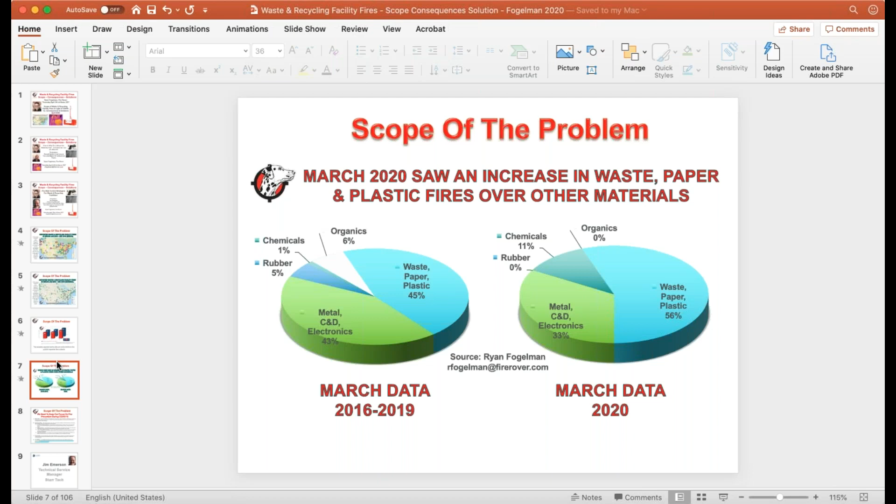But we have protected over 200 facilities. Again, some of those are waste, some are hazardous materials, some are organics and electronics and C&D and others. But we have seen an increase in transportation-specific fires for some of our clients.

So just to get into why in March did we see a lower percent of incidences? There were a lot of locations that were shut down, and we're still seeing that where recycling drop-offs are shut down.

I believe that we have a quarantine effect that we're dealing with, which is the spring cleaning of all spring cleanings. Normally people talk about spring cleaning and it's used in marketing and advertising, but really at the end of the day, who actually does a full spring cleaning? When everyone's been quarantined in their homes, they're doing full spring cleanings.

Meaning basements and attics and garages and every closet that they have. And again, all that material, if they're educated enough to recycle because we as an industry have educated them, they can't leave their house theoretically to go to these drop-off points, and a lot of the drop-off points are closed. So just like anything else, a lot of this stuff will end up in our waste and recycling bins on the curbside.

So what happens with all the old computers when they get taken out, or all the old iPhones, and everybody has a box or two of those, and I'm sure you can relate.

School closures, again, 132,000 schools in the United States have closed. It's a big number, and they still have how many lockers that still need to be cleaned out. The question is, is that going to be allowed for the students to actually go in and clean these out, or are the janitors going to go in and literally just throw these all in, and you're going to get these in your waste stream?

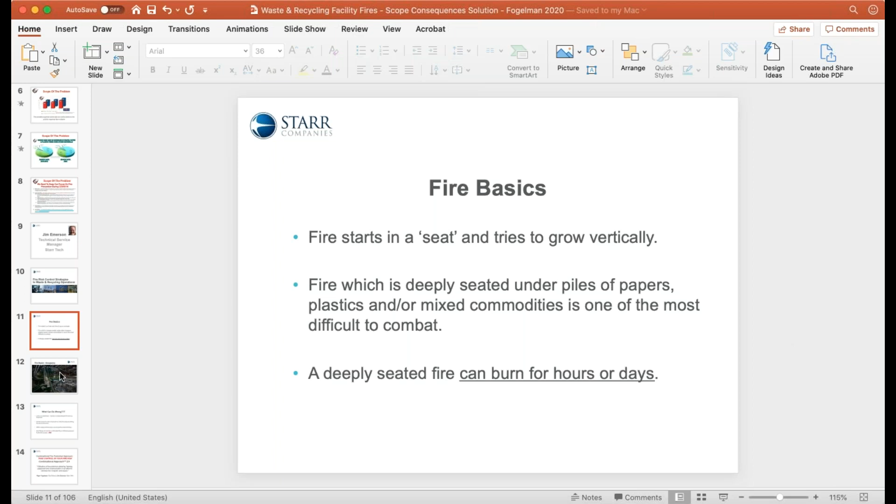So that's really part of the uniqueness of your occupancy. We'll go to the next slide, which shows a picture, and I wanted to outline what's also very unique about your occupancies: the very, very high vertical distance between the floor. You can see the gentleman in the middle there, just to give you scale, from the floor to the underneath of the roof or ceiling.

It's pretty high in a lot of these places, and that presents a very difficult fire challenge. For example, if you have sprinklers, which is what fire protection engineers are trained to recommend all the time, the water can't quite penetrate the uplift plume of a fire. So all those droplets start to evaporate, and then they don't really have a lot of impact when they hit the ground or hit the material. So that high vertical space presents a very difficult fire challenge.

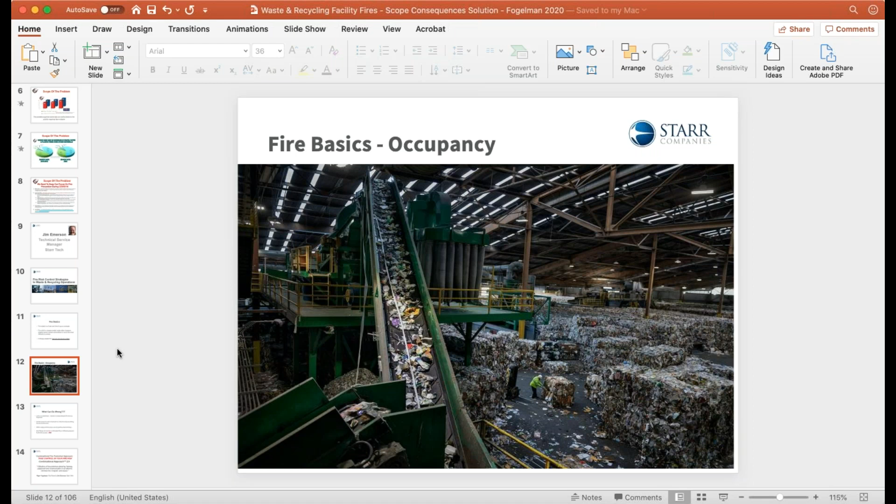Let's go to the next slide. So some of the things that can go wrong are late detection. The longer the period of time that elapses between the seat of the fire beginning—we call that an incipient fire—the longer that time elapses to notification of the fire service, that can result in a vastly different outcome.

One of the things that can happen in a delayed response because of late notification is smoke really prevents the view of the seat of the fire. And just like you and me, the fire department needs to see that seat of the fire in order to know where to apply water and what to do. The longer the fire is going, the heat can threaten the building's structural elements. All that heat goes up to the ceiling and stays there because of the deck, and the steel can start to get soft and not hold its own weight.

Another thing that can happen is if the fire gets really large before they arrive, that water supply you have, whether it's a pond, a tank, or the water supply in town, can be quickly overwhelmed. And a lot of these places are at the end of a dead end on a water grid, that kind of thing, so that can add to the problem.

And all of these things lead to maybe the fire service saying, we don't think we can really handle this on an interior basis, we don't think we can get control of this. So they can decide to go back into a controlled fire or defensive posture. And of course, that's bad.

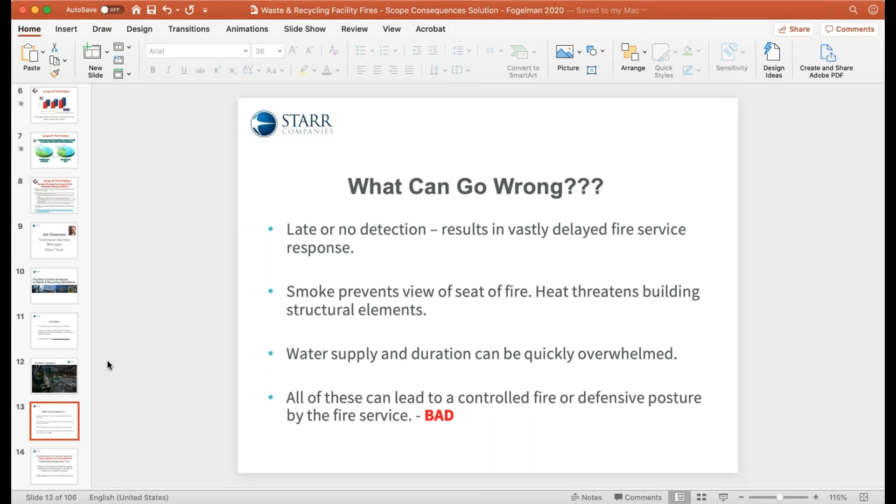We don't want that. So let's talk about this combinational approach and some of the things you can do to incorporate the combination of fire protection planning, training, the right equipment, and communication. The goal overall—and this is another one of our fire protection engineering fancy words—is the footprint. We want to keep the fire kind of like in a box, real small, and that's what's going to lead to a good outcome.

So let's take it away here with this combinational approach. There are a lot of elements here. We try to coalesce this into a pretty tight grouping, and each point here covers more elements than others, but overall, really the most important element is to develop a plan that's site specific for your exact location.

Sometimes you find these fire prevention plans that are boilerplate or checklist. You really want to get something together that's very site specific, including before, and then during, which would be the fire incident response, and then following recovery. So before, during, after—the things that people need to do and to be ready.

I would say including the fire department in that planning, maybe over a couple of visits—bring in some lunch, get them to sit down rather than just a walking tour, but get them to really open up to you. The next element: remember we talked about how important early warning is.

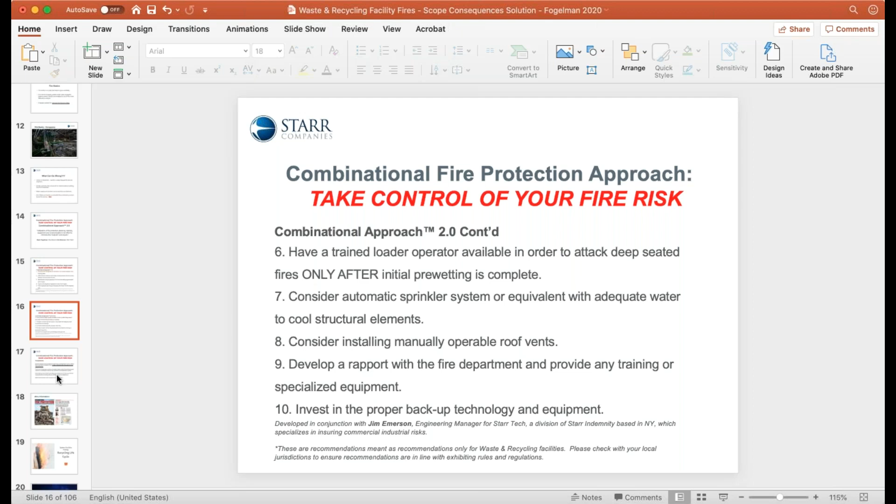It's just good to have these contingencies planned for, and that can help speed the recovery and make it a little easier. All right, enough of me talking. I'll finish up here with conclusions.

This is really probably the most important part of my whole presentation, because we talked about early detection, we talked about application of pre-wetting foam and water, and we talked about sprinklers at the roof kind of being in the DNA of fire protection engineers. But what's different about your occupancy, and probably why NFPA and other code bodies haven't really addressed it that well, is because what we really have to do is take the fight from the ceiling down to the seat of the fire.

Remember that picture with that high vertical clearance? We've got to get the ability to fight this thing from the ceiling right down to the seat of the fire. Point blank is best, but as close as possible. That's what the newer technologies available with nozzles, foam, and cameras can do now, also monitor nozzles with water that can come through these systems. So that's the most important element I want you to take away from this.

And just reemphasizing again, if you can provide only one form of sprinkler head -- because I know doing the whole building, if it doesn't have any, could cost like $1 million -- if you could just protect the structural steel elements in the area with the most combustibles, that can really save your building.

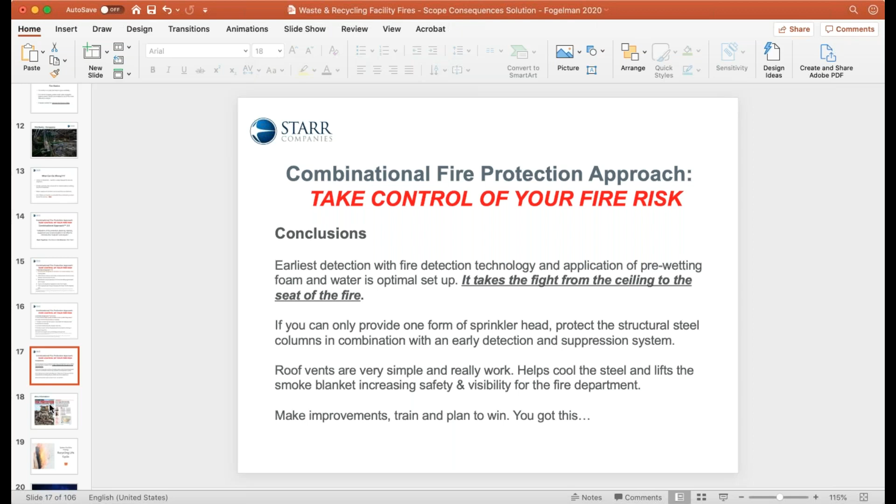Reemphasizing these points again, I think if you take this combinational approach, look at all these 10 elements, and actually do the work to train and plan and make these improvements, you really can make a lot more progress and make a bigger dent in this than you think. So I want you to feel like you do have control over this. If you lean into gear and put your back into it, you really can. Ryan and I, and folks like Ryan and these industry groups, are putting together better plans and better advice than I saw just 4 years ago.

Just to give an idea, Jim and I met at an NFPA conference. So, just like being with Fire Rover, we have a front row seat. I'm also fortunate that I get to sit on NFPA's hazard material recommended practices committee, so I get to see it from a fire protection perspective. The idea originally, Jim and I had written this article that International Fire Protection picked up as well, and it was highlighted in a lot of our Waste360 and other waste publications.

But again, how do you reduce your risk profile? This is really a big piece of this, right? So it's how do you reduce your risk profile on every one of your sites? And I do appreciate everything that Jim has done for helping educate myself and others.

So if you guys have questions, please feel free to ask. I'm going to get into a little bit of how the approach that Jim has described is unique, in the sense of how we look at it from a fire protection perspective. So if you do have questions, please let us know. Jim's still on, and Jim, if you have anything you want to talk through. But what we do internally for specific waste and recycling, right?

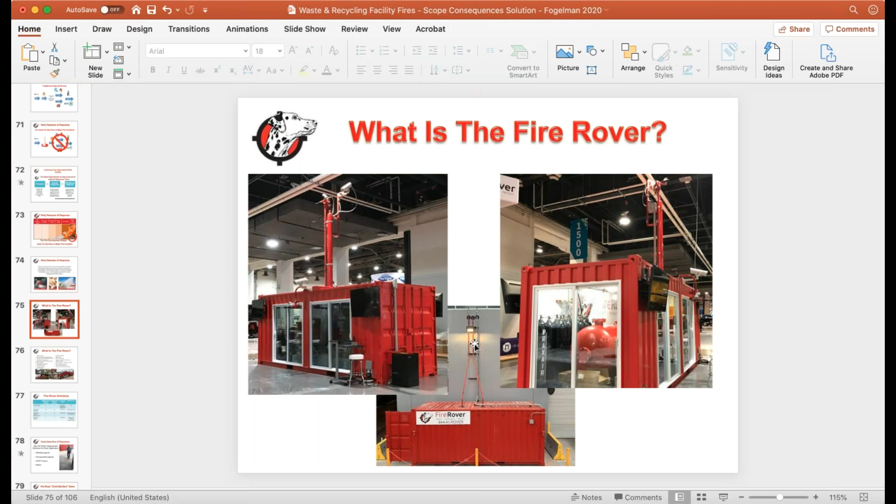If you think inside your 40-foot ceiling, you're going to see cameras and a nozzle out of the way, so your loader operator isn't going to hit them. The sprinkler system is a great system - no one's saying it's not - but when you're dealing with a 30, 40, 50-foot building and you have a ton of line of sight, we believe our solution is superior for a number of reasons.

Our solutions have evolved - we offer the thermal only solution, which is just cameras and nozzles, and then we have these enforcer cap units you can use. These are nice because you're able to shoot 95 feet with our wetting agents.

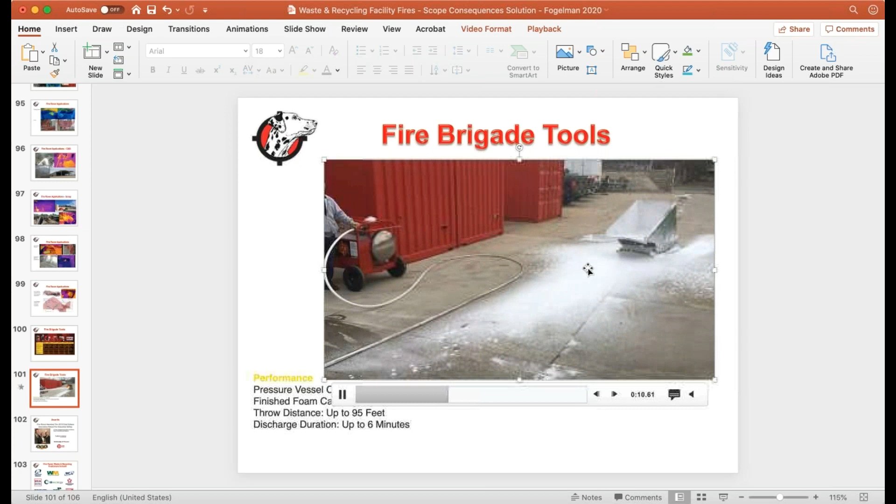They're also nice to have on site for the fire department - when they get there, all they do is turn two nozzles, they don't have to hook up to a hose. While they're spending the 5 minutes rolling their hoses out and getting everything prepared, they can come in and start fighting these right away, assuming they're trained on them.

The second thing we offer is our typical Fire Rover solution, which is that box works for about 6 to 12 minutes. Again, we catch it early enough. I mentioned the rubber fire before, we still had 40% left of our tank after we were done fighting that fire. That solution works really well if there's no access to water on site. And it works really good for transfer stations, MRFs, and others when you do have a backup sprinkler system, or a fire department that's close enough, within 6 to 12 minutes. So we're spraying and then they're on site.

The Fire Rover sprinkler replacement, and this is unique. We're doing a lot of applications in lithium-ion batteries outside of waste and recycling. But what we've built with this is that we've replaced sprinkler systems with cameras and nozzles. So for example, we just did one of the large OEMs, electric vehicle OEMs, recycling facilities, and we have 3 Fire Rover boxes, 8 cameras, 6 nozzles, covering a pretty large footprint in the building.

The fire department wanted to ensure that we would have continuous access to a water supply. So after the 6 to 12 minutes is up in each one of those Fire Rover boxes, we have a manifold that comes off the back that they can do a quick connect from the outside and use the water from the public source through their trucks. So the idea is you can use the Fire Rover system, the exact same solution as our existing, but now we can also shoot for as long as there's access to water from the city.

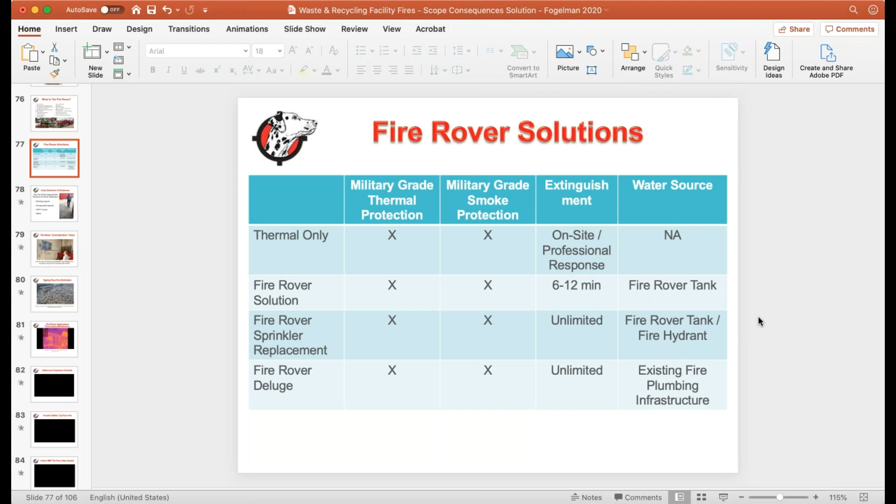A quick point here. As a fire protection engineer, I'll be talking to plant managers and they'll say, well, we don't want to put water on a small fire because that'll cause water damage. And I say, well, what do you think will happen when the fire department gets here? They're going to put water on it, because the fire department puts water on the fire. But if you wait 5, 10, 15 minutes longer, the fire's bigger, they're going to have to put even more water on it, so it's going to cause even more water damage. A little water right in the beginning that knocks the fire out can be extremely advantageous, especially in an occupancy where there's sensitivity to water and smoke, because you're reducing the amount of smoke developed that can cause a lot of problems with electronics.

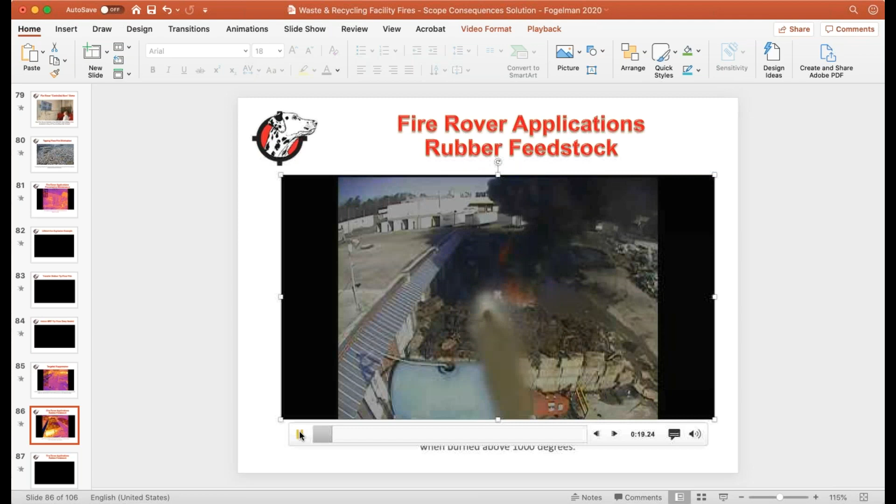So you have to realize when the fire department gets there, if you do nothing, they're just going to put a ton of water on it and keep going. So you're basically doing their work in the first 5, 6, 7, 8 minutes remotely in a safe manner that's going to keep that fire in a very small footprint.

Yeah, thanks, I think it's great. And I think, I know Kimiko, you had asked me this, this is a rubber feedstock fire. So what had happened is, our unit is actually installed outside. We're actually hitting the side of the building, so the collateral assets can't be burned.

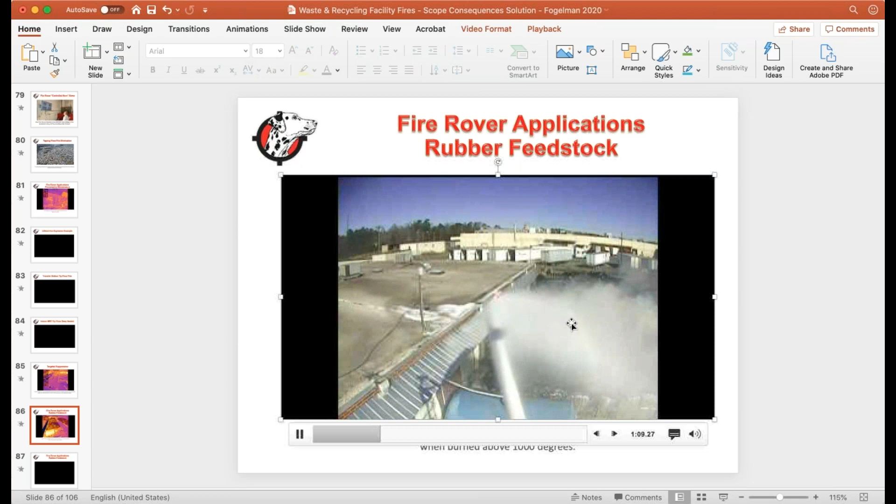And then also we're shooting an encapsulator agent, so it's a little different. Jim just mentioned having water, but when we shoot for that first 6 to 8 minutes, the encapsulator agent we use puts a reverse polarity around the water molecule, so it doesn't treat what it's hitting as water, it doesn't steam off and doesn't react the way a water droplet would. And again, it's fluorine free, it works like a Pac-Man in the sense. So you can see this is a rubber fire, we had this out in 4.5 minutes.

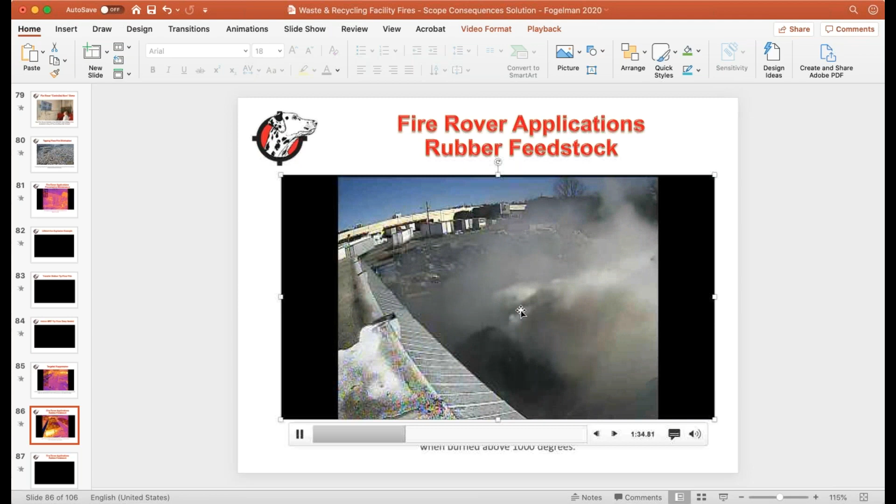We called the fire department. We did everything we needed to do from a communication protocol, but we'll gently keep working away at this fire continuously, right? Until we know—and the beauty of our system, it never resets. We still have 40% left in our tank. We have built-in fire watch, so the days of spraying your piles for 3 days because the fire department requires continuous fire watch spraying—basically technology has protected against that.

I think one of the big issues, and the reason why a lot of people say 'why would you go back to having a human make the decision on whether or not there's a fire'—that human element is really, really important because they can see it. In our locations, it's not like we're sitting in a big storage area where nothing ever moves. These are live locations—there's loaders working, there's people working.

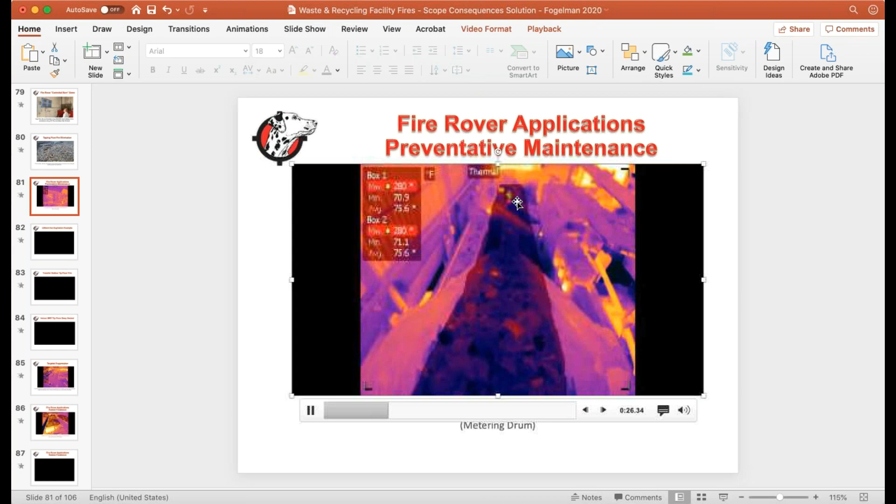This is one of the things where we're actually trending heat—this is on an in-feed line. This actually started a fire, but typically the way this works is if we see an abnormality, we'll let the operators know. They look at it, they stop. We also have a camera set strategically where it'll shut down the entire conveyor operation. So it's kind of nice to have that, where at least we know the fire is isolated to the specific area where it started and it's not moving throughout the operation, which we've seen happen a number of times.

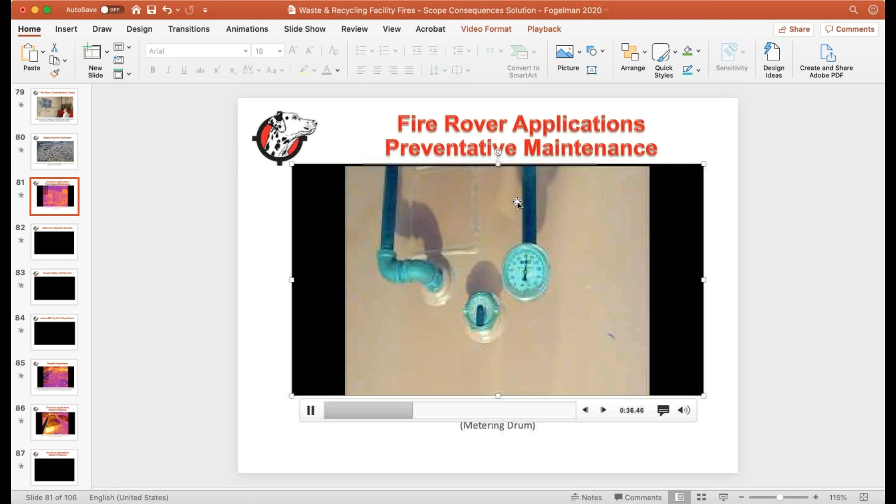That's critical, Ryan, because in really large fire scenarios, a lot of times when we have belts, other moving equipment, robots, guided vehicles, large conveying systems, carousels—one of the big problems in fire proliferation can be moving equipment. So having an interlock to the existing emergency power off circuit, just as if someone were to hit the mushroom button, but plugged right in and interconnected with some relays—easy to do—it can make a huge difference.

Sorry, I was with a couple people. Can you guys see? Yep.

Okay, cool. All right, one of the things too—I'm not a big fan of fire extinguishers, right? Jim, I don't know, you can give us your opinion on this, but in this one, the reason you saw that big mess before—that was actually two employees right here. Two employees are shooting it with a fire extinguisher.

Again, they shouldn't be there. It was a little bit unsafe. But at the same time, they're stopping us from shooting the fire rover because we don't want to hit them with our stream. And the fire is able to, in that small amount of time, get to the next level. So my experience is I keep seeing it, and it's like them poking the bear.

I mean, you tell me, I don't know. Oh, it's all bad. And what I found from 35 years of doing this is, I would go in and say...

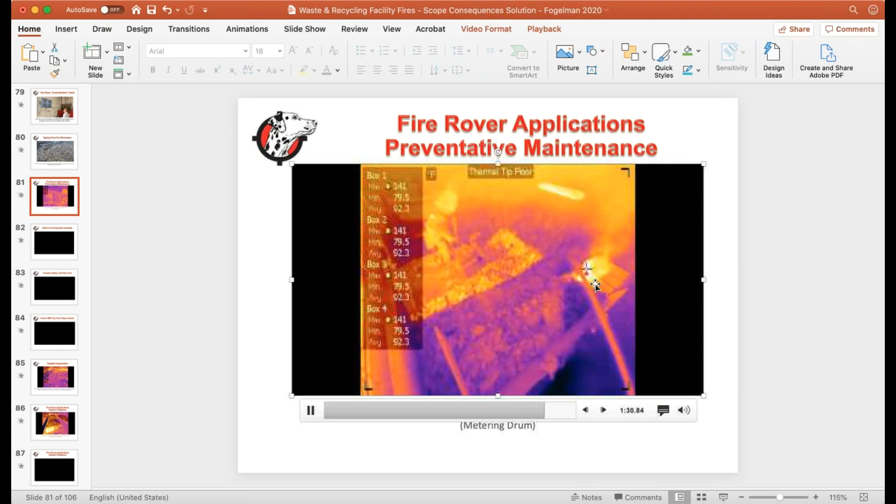Hey, what's been happening? Oh, we had a fire. Okay, what happened? Such and such, we grabbed an extinguisher and started applying it. And then what happened? Oh, we ran out of the extinguisher and had to round up two more. And then what happened? Well, we ran out of those and went and got four. And then what happened? We ran around the entire place, and it's like, oh my gosh.

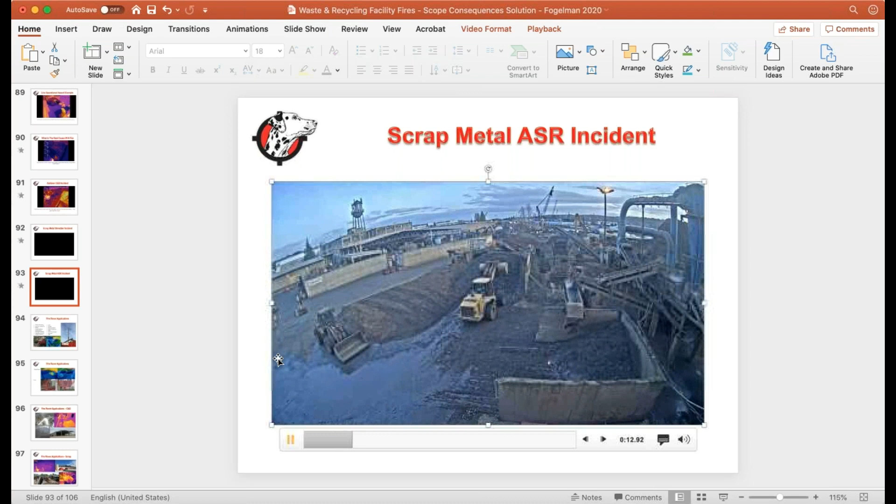First of all, you shouldn't be playing hero with this. Number two, you just can't get enough extinguishers. Number three, if you use a tank system like this, or water, which in theory has an inexhaustible supply, or a combination of both, you're getting the person away from the fire and hitting it with everything you need without running out.

So yeah, the fire extinguisher really is for a very small incipient fire only, like a wastebasket fire. And then the other thing I think of for the fire extinguisher is maybe an employee has to grab one to fight their way out of a corner or something, but that's about it.

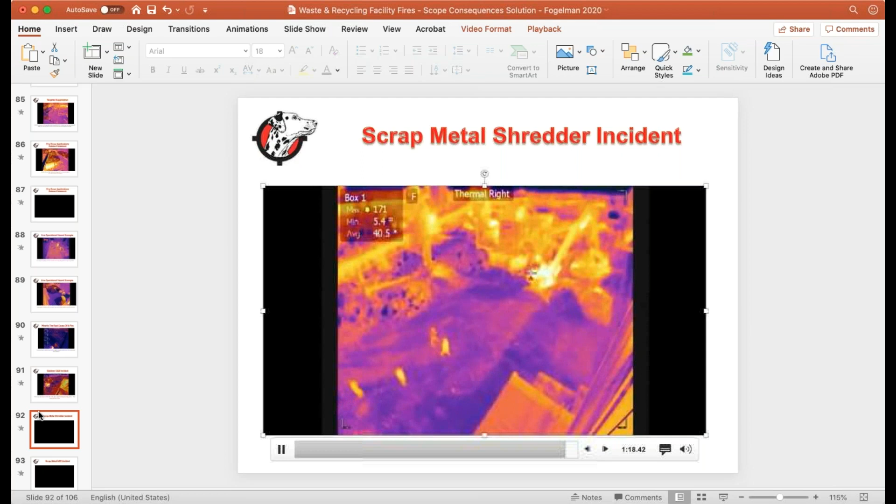And I think for years you've had forensic fire investigators go into a waste facility and say, oh, it's a lithium-ion battery fire, and I don't know how they can figure that out based on the amount of blackened material that's there. Jim, I don't know what your thoughts are, but a lot of that is just pencil whipping sometimes, with either lithium-ion or an electrical source, but it's partially unconfirmed or not confirmed forensically. So it's not always as accurate a process as you might think.

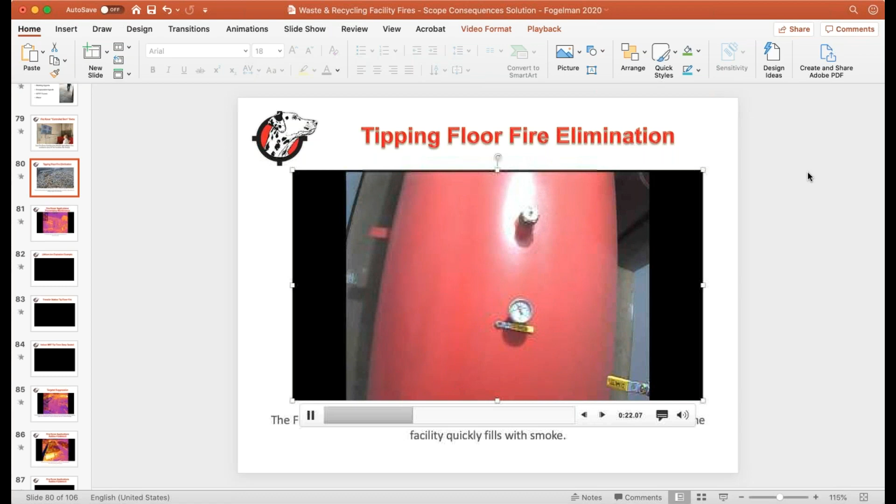The Bronx facility, I had designed and built that plant, and of course we put some strategic hose reels around as part of our fire prevention plan. I can definitely see, Ryan, you've been out to that site, the fire rover being very advantageous with our stockpile. As you remember, we have an elevated tip floor where trucks tip off, which goes down to the lower level recycling stockpile to the right, and then MSW. So it's a mixed tipping floor.

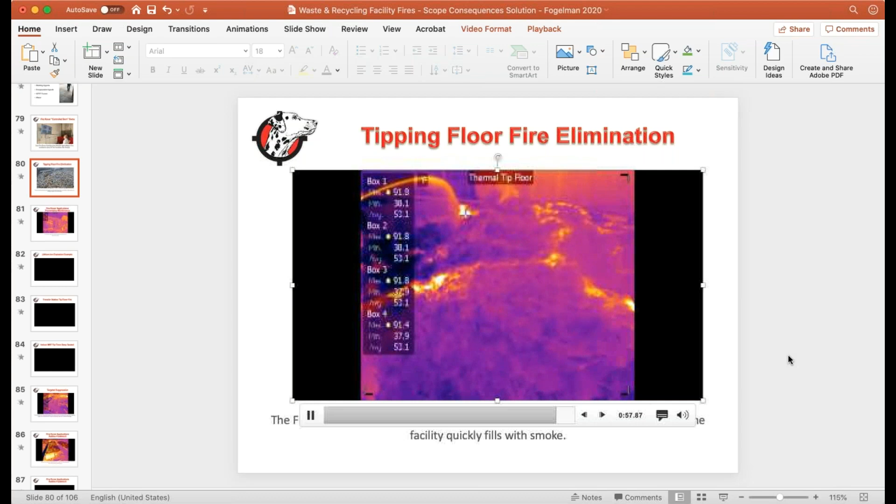But the question I was actually trying to get to, long-winded here today for some reason, is: when you're at the viewing platform and come down the back stairs where you can't really see the tipping floor that well, you can see a lot of our QC stations where we have live bunkers underneath, which would be very difficult for the fire rover to even remotely get to.

So I guess my question is: is there a miniature or downsized system in lieu of putting sprinklers in those live floor bunkers, just because of the difficulty running piping and breaking heads? Is there a system with your product and materials to extinguish fire in a more compact form, that could get the areas you can't reach with sprinklers above, like picking stations, conveyors, and where material is stored in live floor bunkers?

Well, I think we do a ton of bunker protection, and we have to take it from a specific level. We can put a camera and a nozzle, but typically if it's a closed bunker, the answer is no—there's a lot of customers that have had those types of fires. But if it's an open bunker, we do a ton of those in scrap metal, MRFs, and transfer stations. So I think it just depends. We need to get the best angle.

So when I think of your facility, I know you had the three layers of conveyors, and Jim, this is one where the insurance companies wanted sprinklers on all of their conveyors—basically everything else. What we did was take a Fire Rover box over a storage area, and also had three nozzles and cameras strategically placed so we could get like 80% view. When we say 80% direct view, there's always an indirect view we can see too, so that heat abnormality—because the fire isn't going to sit in one little spot—we were able to see about 80% of the area.

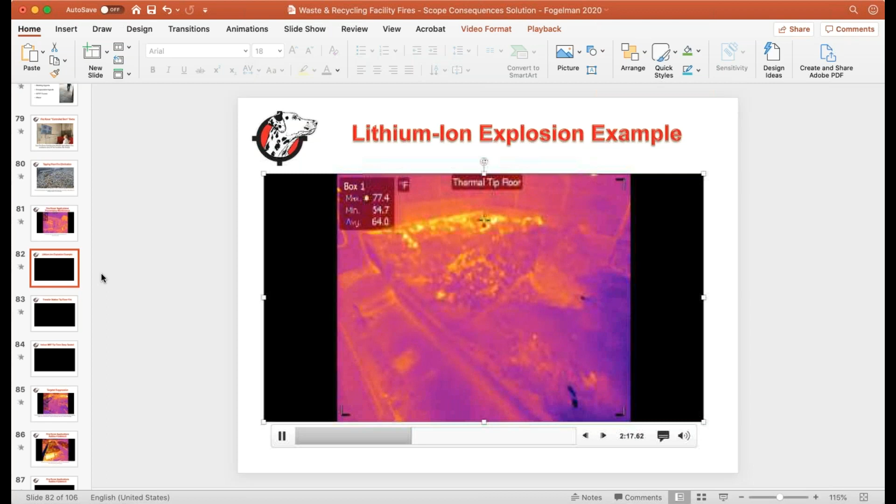Thanks, Ryan. I think it's a big area of concern, not only on the insurance side but for ourselves as operators. I don't know what the next step would be, especially in today's climate, but hopefully in the near future we can gather back on site. I'll make sure I get there this time and point things out standing there, which is a lot easier than just chatting about it. But I think there must be something we could do, even off the wall behind it, to get a better angle on what we call phase 3 of the plant.

Yeah, no, absolutely, we do that. And you say off the wall—I love it, that's the ricochet. I'll show you a couple examples of how we do that at sites.

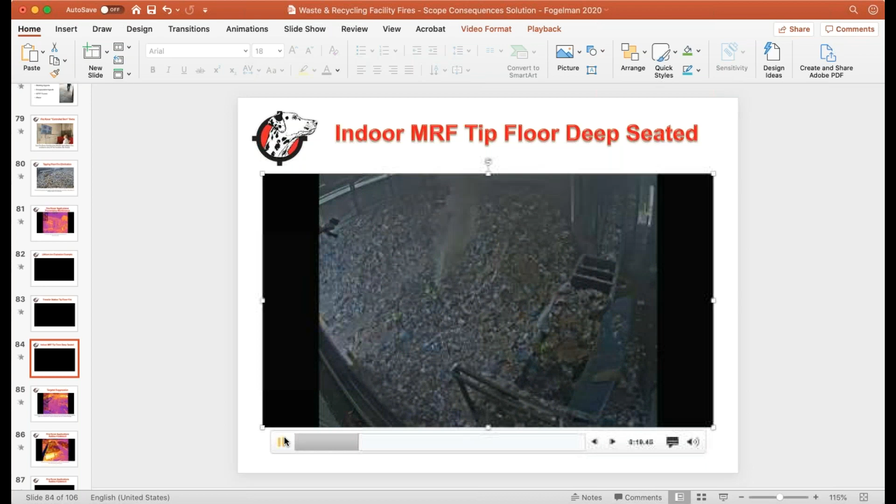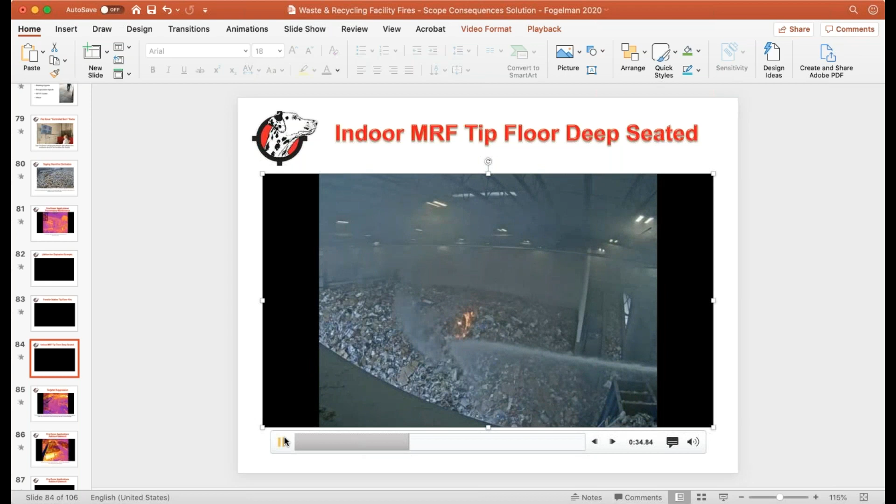Yeah, that's what I mean, because I've been out there, I understand that facility—I've been out there a couple times, and I know Pete was out there too. So if you want to take a picture of the specific area you're talking about, from the perspective where you get it, or get on FaceTime, happy to do it. I think that would be pretty helpful, obviously in lieu of traveling right now, as the whole world is. But Pete and I have been at the site enough times that I remember most of it, and we have a layout as well in my files. So if you want to get a picture of that specific area, we can see what we can do tying it into the rest of the protection.

Yeah, I think that's a good idea.

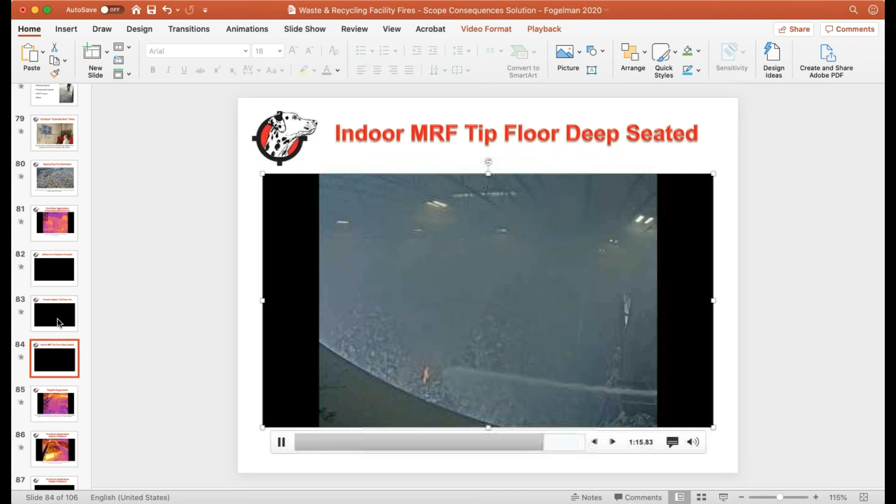We still have one of our main guys out there on site, and I've got a giant construction project starting at that location for the ramp that goes to the elevated tip floor on May 4th. So maybe what I'll ask Billy Adelaide to do is, better than a picture, take a video of that area, and get it to Sal to shoot over to you, and then maybe the three of us could jump on a call and chat about it. Yeah, that sounds great. If he can be there live with my engineer, if I can get Pete on the phone and have him say, okay, I want to see the top, show me these areas, that's helpful. But a video would definitely work. All right, thank you, cool.

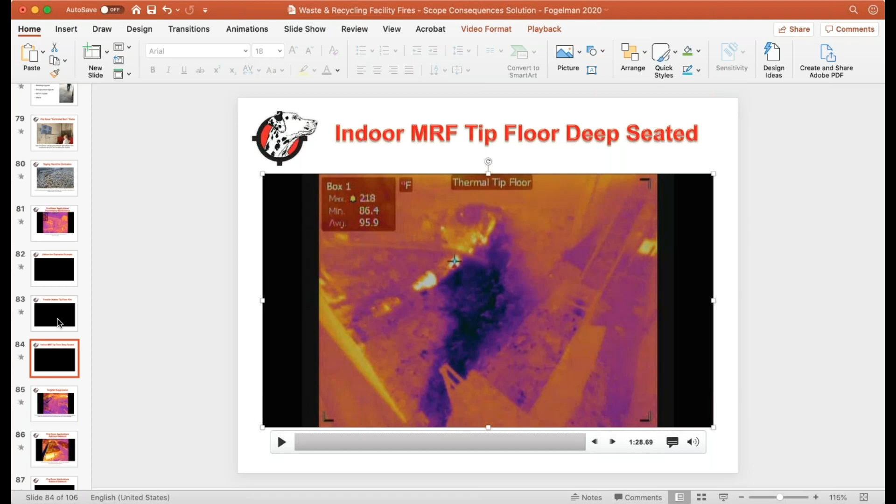So is there any other questions? I know Kimiko asked about tire fires.

So I did show the rubber feedstock. This is what happens after they're shredding the tires inside the operation. They're coming out through the shredder, and then you have these feedstock piles. I think it works the exact same way — I'm going to look at it from a thermal perspective. Especially with a pile of tires, we're going to look and see if there's a heat abnormality anywhere in those spots. And I know you said you're in Puerto Rico — I've seen a ton of the fires you guys have been having in the Virgin Islands, I thought it was St. Croix — but we can definitely handle rubber fires or rubber areas, it's definitely something we can handle. And from a fire protection standpoint, the rapidity of that knockdown is jaw-dropping to us. We've never, in the fire protection community, seen that kind of quick knockdown, because that's one of those ugly little fires we're trained to say, oh, that's going to go on for hours. That's the norm in our fire protection engineering community. So seeing that kind of knockdown and control, that's astounding.

Well, believe me, I think all of us, as you know, Brad created this with Jeremy and Pete, and believe me, the day we saw that fire and saw the power of everything we thought it could do was an amazing day — where it's like, oh my God, we literally just put out a 3,000-degree rubber fire in less than 4.5 minutes. So when I say that, you say that to any fire engineer and they look at you like, come on dude, no you didn't. Yep, and all the other things — but there's a ton of different applications out there. And I do believe that waste and recycling, we've been blessed. They've really taken to our solution in a relatively short manner, 4 or 5 years — that's a blink of an eye in the fire protection industry.